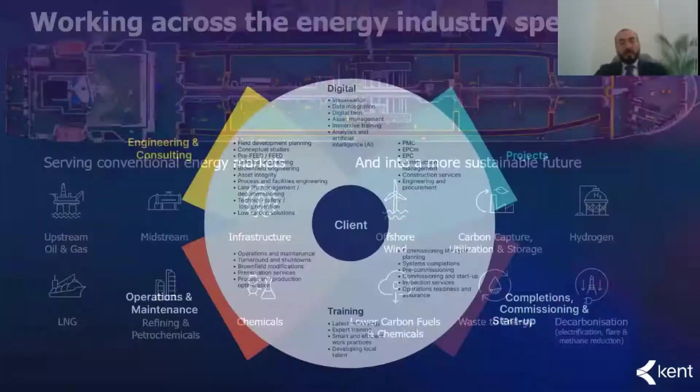A little bit about our services: we are providing advisory services, digital engineering, traditional engineering, projects, completion and commissioning, operations, and maintenance.

With projects executed in more than 80 countries, our ambition is to become the global leader in integrating energy services driven by sustainability and innovation.

Our innovative digital solutions cover the full life cycle of your asset, from planning, design, construction, and operation. We are pioneers in the digital twin, and we help our clients plan and design properly the implementation of digital twin for all phases of the life cycle, starting from engineering, construction — the smart construction we call EPC 4.0 — and operation to reach the predictive analytics we are going to describe today.

Talking about our credentials, we have delivered many projects in all industries, not only oil and gas. We are pioneers in the energy industry in transforming our innovative solutions into value, to unlock the real value of digital technologies in this industry.

This year, we delivered the most advanced digital center for ADNOC IWC, which is the advanced version of Panorama. It's based on digital twin, and we've implemented technologies like virtual flow meter, geofencing, and the looking glass for training. So let's take a step back.

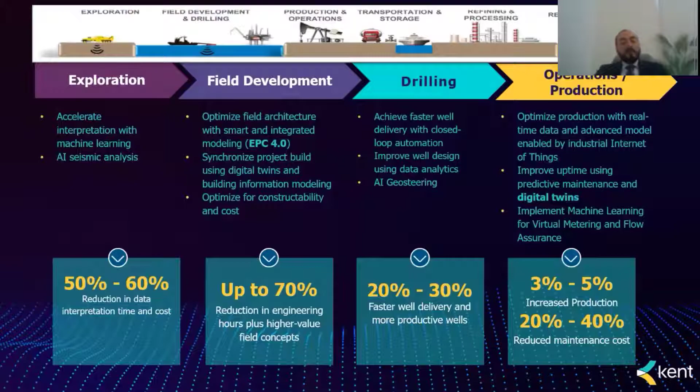Probably what was not clear to many operators is the reward of digital twin across the life cycle of oil and gas fields. What's helping us these days more than ever are advanced technologies to capture more data and analyze them to move toward digital assets.

Talking about IoT devices, AI cameras, high power computing, machine learning, data sets, 5G, robots, satellites, and drones.

What is needed to unlock this value — the real value of a digital twin solution — we need to have a roadmap, to reduce cost and enhance safety. But how to achieve this roadmap?

Digital twin is about moving from static information to real-time information. It's about the connection between the physical asset, the physical environment, and the digital environment. This is what we call maturity levels — we have a one-way integration, and we have full integration and synchronization between the two environments.

A feasible approach is to look at digital twin as a roadmap which can increase financial benefits throughout its evolution. The digital twin roadmap must focus on creating business value at every step through better integration across various technical disciplines, organizational functions, and key players in the value chain.

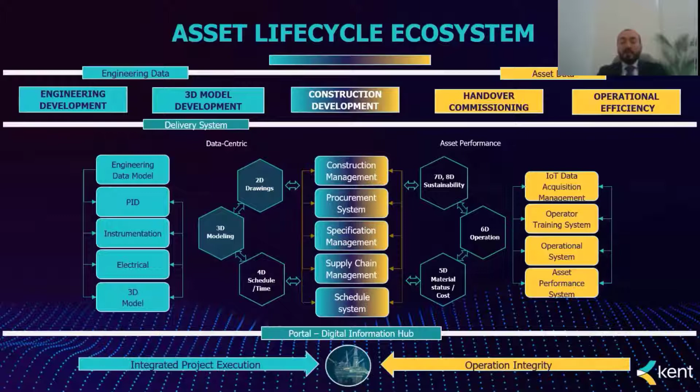Well, what is the framework then? So digital twin is an ecosystem of asset lifecycle where data gets read and matured as we move forward toward operations phase. It's an ecosystem of asset information, tasks, process simulated and displayed in digital context for integrated project execution and unified and predictive operations. All project stakeholders and operations team contribute to the development of this ecosystem. It's like a Google map built and consumed by all of us, talking about traffic data and documents and information that we publish.

So we really need to take the concept of digital twin as layers. We start with the 3D model, which is very important for us in the energy sector, which is the foundation of digital twin. I know other industries don't care about the 3D model, they maybe just focus on dashboards, but for us it's really important.

So engineering data increase as activities proceed, and are updated to reflect as-built status. Real-time operation and maintenance data are integrated in the digital twin, and engineering data maintained as operated. Live streaming is a layer to monitor operations data. Operational historical data will provide analysis and insights, and can be used for unmanned and autonomous operations.

And during operation, this is where we start integration with real-time systems, talking about the DCS, the historian, the LIMS, and the GIS to achieve this ecosystem. The digital twin at the end is the brain of data, to control all this integrated data in an integrated approach, with integration between all the systems. So it's a system of systems to be able to achieve our goals.

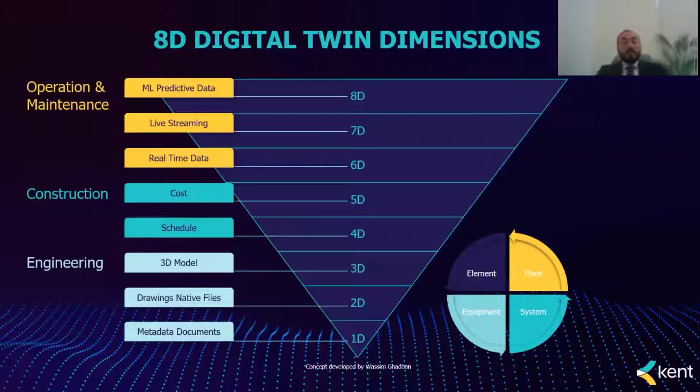And that will lead us to the definition and concept of 8D digital twin. It's not BIM, it's more specific for the energy industry and drilled down to equipment level. So for each equipment, if we consider for instance a pump, the 8D digital twin will provide remote operators and an AI autonomous model with all data captured during the project lifecycle by different systems and tools in different timelines.

So if we look at the pump, what is the information we're talking about? The 8 dimensions: all engineering specifications, data sheets, P&IDs, PFDs, 3D model, point cloud, GIS coordinates, cost information, risk data, installation and maintenance schedule, real-time operational data - pressure, temperature, vibration - spare parts available in the warehouse, work orders, permits, live streaming from satellite or CCTV, and the dynamic machine learning model, which is a portfolio. We call it the dynamic predictive portfolio for each equipment.

So the important part is this is a single source of truth that will reduce downtime, optimize operation, and make the right information available at the right time to the right team to take better decisions.

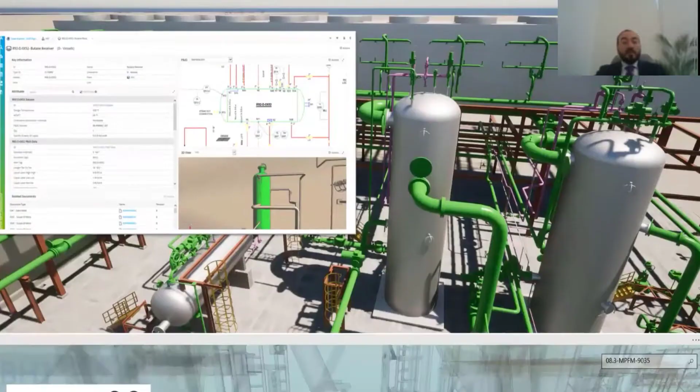So for instance, if you look at how the digital twin platform works, in all platforms you have the same thing. You can visualize the equipment, see the information in its context, see the faceplate of each equipment with real-time information. You can also see information captured from engineering and construction phases, data from different tools integrated with the digital twin. You'll be able to walk through inside the digital twin, visualize information based on your queries, and group it by systems based on your needs.

So it's very important to always differentiate between the digital twin and the digital twin experience. The digital twin experience is about how you consume this data. After you build your digital twin, you can visualize and consume this data whether using a desktop, a tablet, or a video wall. This is what we see in the digital center, like in Panorama, Dhahran, or IWC projects that we delivered.

Or you can use immersive technologies - HoloLens, for instance, to overlay the physical equipment with digital information, or VR for training and simulation. All of these are considered the digital twin experience, the ways that we display the information of the digital twin.

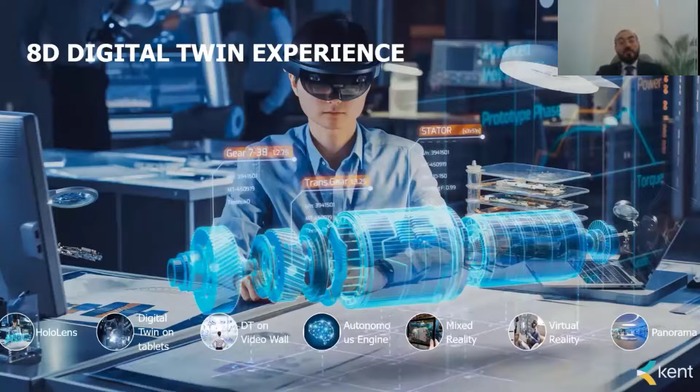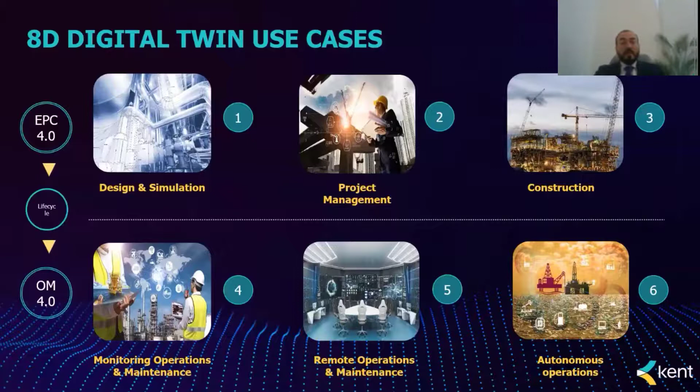The biggest mistake I see these days is to consider digital twin as a one-solution-fits-all purpose. It's been said the digital twin is a replica of a physical asset, but please don't wait till the physical asset is built to have a digital twin, as the value covers both project and operations of the asset. For project we call it EPC 4.0, and for operation it's OM 4.0. The digital twin has a role to play virtually in every step of the asset lifecycle, from immersive and automated design in the design phase to informing the supply chain in the operations phase.

So for project, it's about optimizing engineering activities by automation, immersive design review, data-centric and unified engineering, progressive handover, 4D, 5D smart construction. It's about safety enhancement and real-time progress - you can display the progress of your construction in 4D, 5D as well in digital twin.

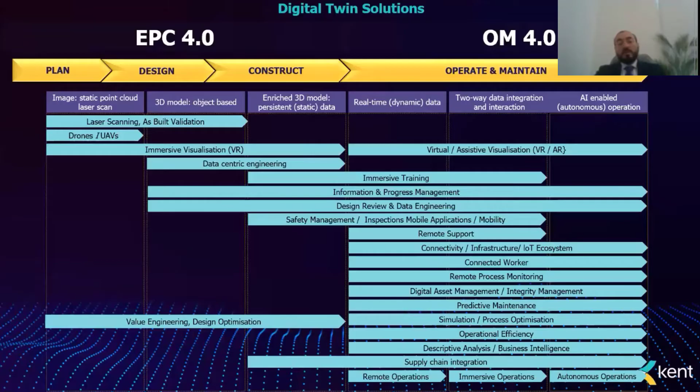In operation, it's more about asset performance management and supply chain, connected workers, predictive and prescriptive analysis, integrity management, immersive training. And the list goes on as we move toward digital assets, contributing to our vision of achieving a global ecosystem where everything is synchronized and integrated. Thank you.